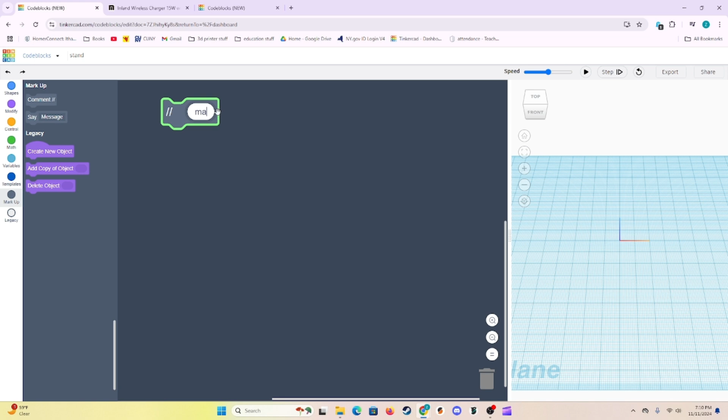In order to make the body of our phone stand, we'll first drag in a polygon shape. We'll open up this menu, and we're going to set the sides of our polygon to 3. After that, we're going to drag in a scale XYZ command, and we're going to set the X scaling to be 8.1, the Y scaling to be 8.1, and the Z scaling to be 3.75.

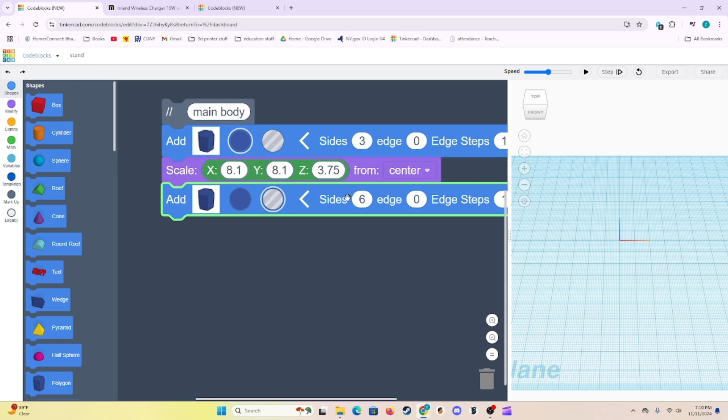Now we'll go ahead and drag in another polygon. We're going to change this one into a hole by clicking the gray circle. We'll set the sides to 3. And then we'll drag in another scale XYZ command. For this one, I'm going to set the X scaling to be 6, the Y scaling to be 6, and the Z scaling to be 3.75.

Now we'll go ahead and drag in a move command, and we're going to move to a Y of 10. After this, we'll drag in a create group command. And then we will come up here and we will drag in a cube box. We're going to set this one to be a hole, and by clicking on this little arrow, we're going to set the width to be 140, the length to be 140, and the height to be 140.

Then we'll drag in a move command, and we're going to move that box to an X of -74. Then we can go ahead and drag in a create group command. We'll go ahead and drag in another box. This one we'll leave as a solid, and we're going to set the width to be 4, the length is going to be 110, and the height is going to be 75. After that, we'll drag in a move command, and we're going to move it to an X of -2.

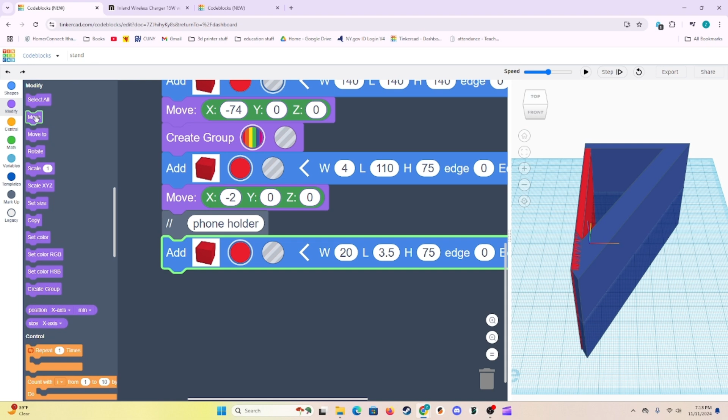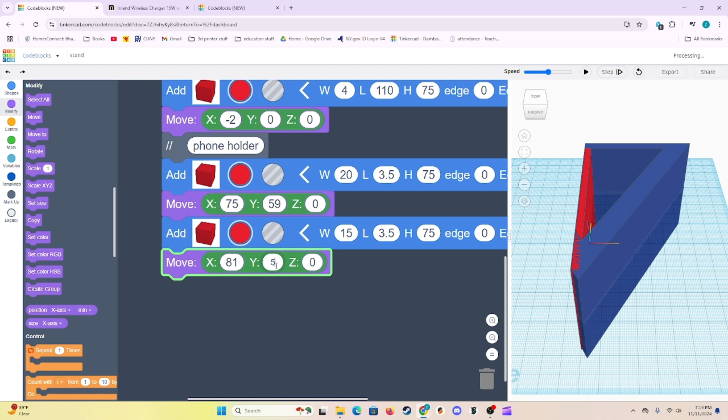Then we'll drag in a move command, and we're going to move this to an X of 75, a Y of 59, and Z we will leave at 0. Then we'll go ahead and drag in another box. This one is going to be set to a width of 15, a length of 3.5, and a height of 75. We'll need another move command for this one, and we're going to be moving this one to an X of 81, a Y of 53, and a Z of 0.

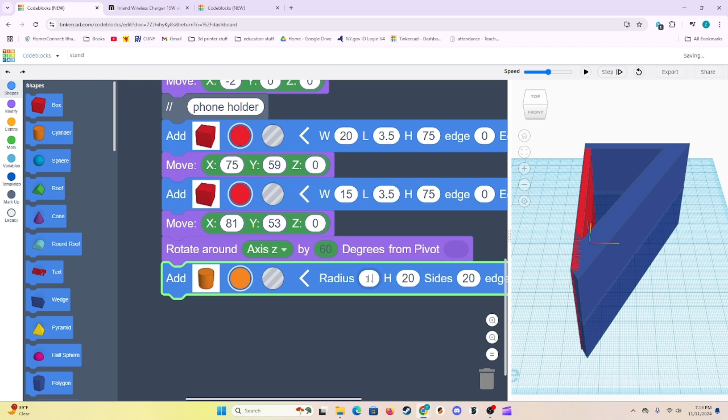We'll then drag in a rotate command, and we're going to rotate around the Z axis, and we're going to rotate by 60 degrees. Then we'll drag in a cylinder. We're going to set the radius of our cylinder to be 1.75, and the height is going to be 75. We'll then move this cylinder to an X of 85, a Y of 59, and a Z of 0. Then we'll go ahead and drag in the create group command.

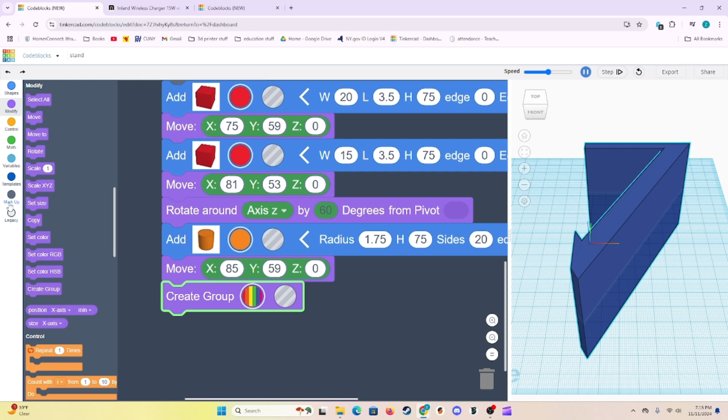With the phone stand done, we can begin working on our next part, which is cable channels.

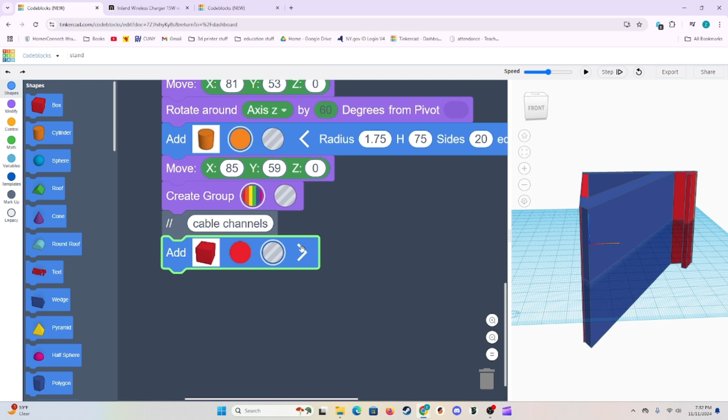In order to create the cable channels, we'll have to drag in a box. We're going to set this box to be a hole by clicking the gray circle. Then we're going to set the width of our box to be 40, the length will be 10, and the height will be 11. We'll then drag in a move command for this first box, and for the first box, you're going to move to a Y of 53.

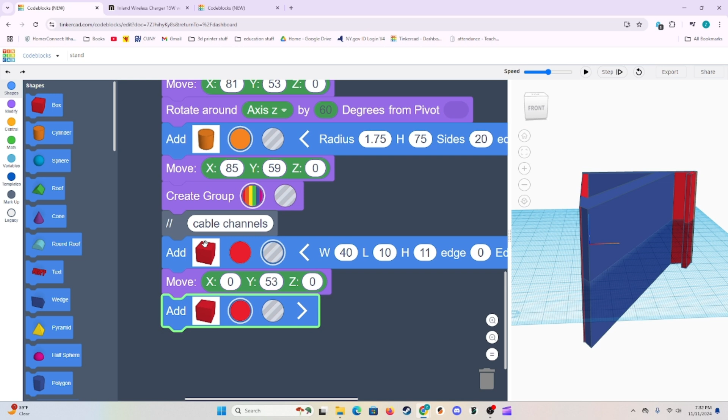We'll then go back and drag in a second box. We'll set this one to be a hole as well. For the second box, the width will be 10, the length will be 14, and the height is going to be 11. The second box will be moved to an X of 0, a Y of 0, and a Z of 0, so it'll stay in place.

The third and final box we'll drag in. We'll set it to be a hole by clicking this little circle, and then we're going to set the width to be 25, the length is going to be 8, and the height is going to be 11. For the third box, we'll also need to rotate it. We're going to rotate it on the Z axis by 60 degrees. Then we'll drag in a move command, and we're going to move this third box to a Y of negative 53.

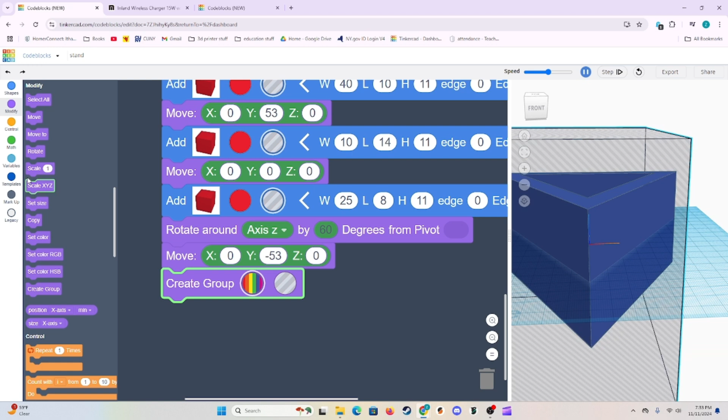After that, we can drag in a create group command. With the cable channels of our phone stand done, we can begin working on the next part, which is some decorations.

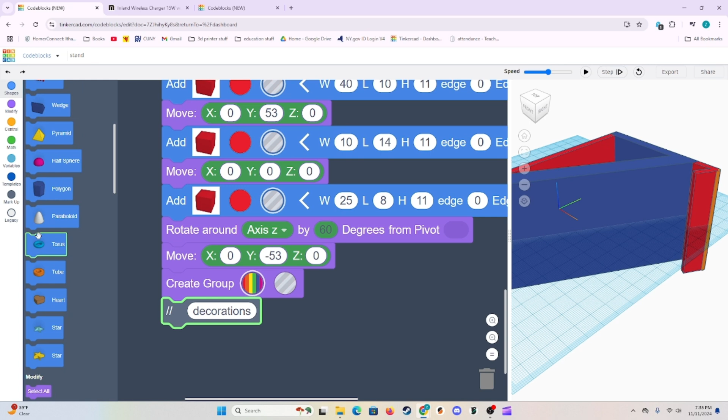In order to decorate and personalize our phone, what we will do is go back to our Shapes tab, and we're going to scroll down until we find the text. We're going to click on this, and we're going to set in whatever you'd like for your phone stand. Because Micro Center donated $250 to my classroom, I'm going to name this after them.

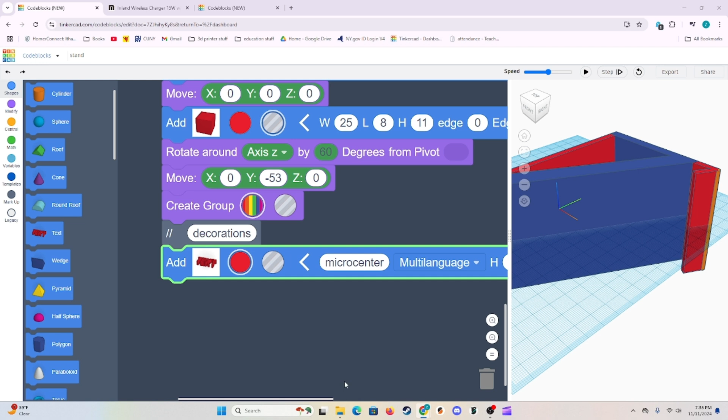The only things we're going to have to change is we're going to go over here, and we're going to set the height of this text to be 5. We're going to set the edge to 1, and the edge steps to 1 as well.

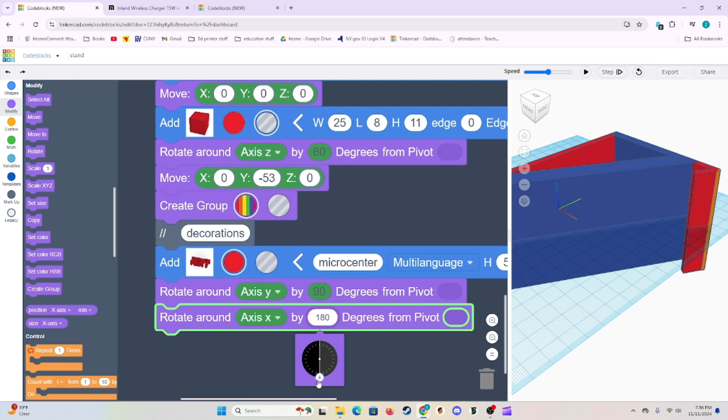Then we'll drag in a rotate command, and we're going to rotate on the Y axis by 90 degrees. We'll drag in a second rotate command, and this time we are going to rotate on the X axis by 180 degrees. And we'll drag in a third and final rotate command, and this time we're going to rotate on the Z axis by negative 30 degrees.

We'll then drag in a scale command, and we're going to set the scaling to be 0.4. And finally, a move command. We're going to set this text to move to an X of 82.25, a Y of 53, and a Z of 0.

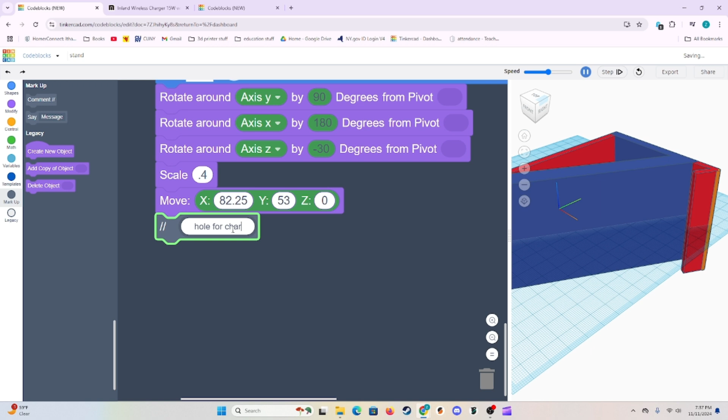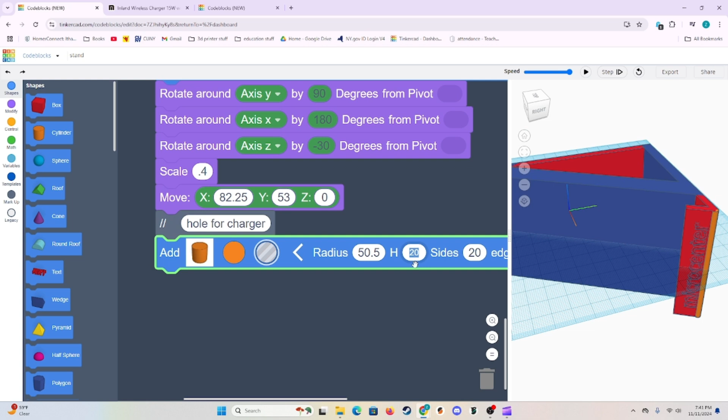With a little bit of decoration done, the last thing that we need to do is add a hole for our charger. In order to do that, we'll go into the shapes and we'll drag in a cylinder. We'll change it into a hole by clicking this gray circle, and then we will set the radius of it to be 50.5. The height will be 7.2, and the sides are going to be 64.

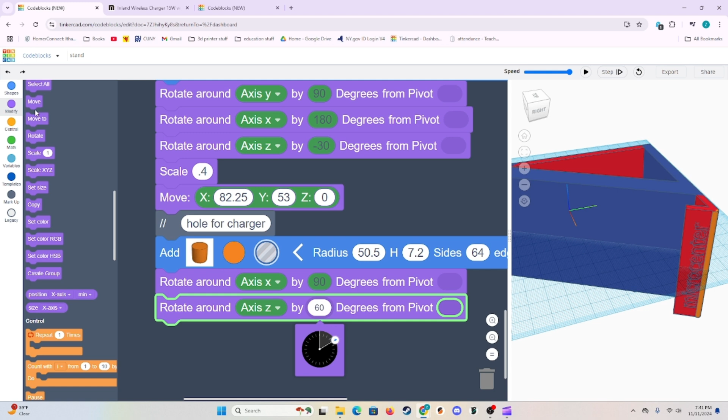We'll then drag in a rotate command, and this first rotate command is going to rotate around the x-axis by 90 degrees. Then we'll drag in a second rotate command, and this time we are going to rotate around the z-axis by 60 degrees. We'll then drag in a move command, and we'll move to an X of 31. And finally, we can drag in a create group command to finish our work.

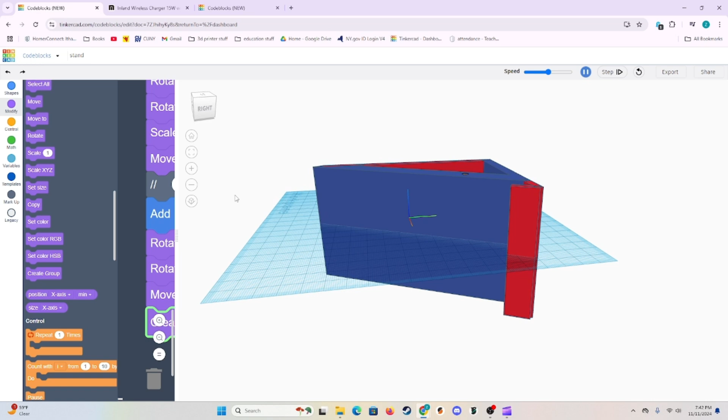With that done, we can press play, and we can watch the entire phone stand be made. If we turn around to the back, we see our holes for our cable management, and on the front we have our text as well as our hole for the wireless charger.